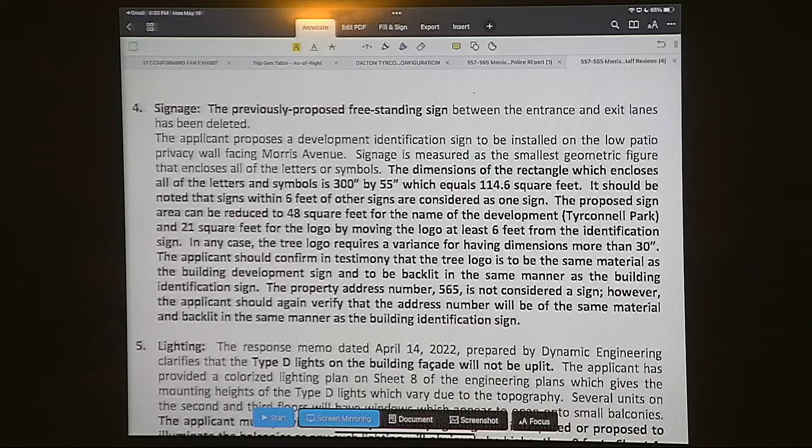Krista had a question about whether the number and the tree graphics would all be of the same materials, and the answer to that is yes. The intention is everything will be backlit in the same manner, so it will be consistent between the Tyrconnell Park name, the tree, and the letters and numbers. As noted by Krista, the numbers are not included in that 62.5 square feet because they're not required to be included in that number.

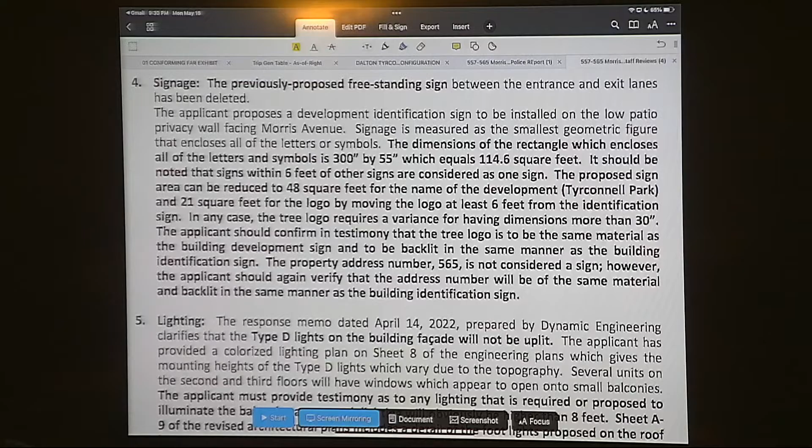Her next item, item 5, had to do with the lighting. Just to reiterate, the type D fixtures will not be uplit. That's also provided in the civil engineering testimony that will follow. The other question was just the trellis fixtures, which were mentioned before. Those fixtures are just downlight fixtures, and they will be concealed within the structure of the trellis. They're 9.5 inches high, and the trellis members are 12 inches high.

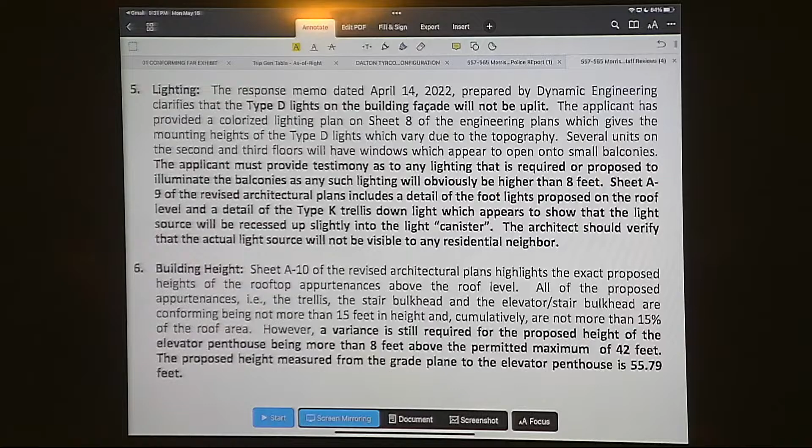Then item 5 on Krista's memo - there was one other comment that Krista had on the required lights on the balconies. All of those lights on the balconies are required, right? That is correct. We are required to have one light on those balconies, and they're type J fixtures, and they're shielded fixtures, so they just throw light down, and there's one at each balcony. Ms. Alfonso, can you go back to A9, just so the board members can have an opportunity to see the particular fixtures that Ms. Doherty is referring to.

When you say the balconies, you're talking about the usable balconies, not the Juliet balconies, correct? Yes, just wanna confirm there are no lights at the Juliet balconies, correct. And you said it's type J? It's type J at the balconies.

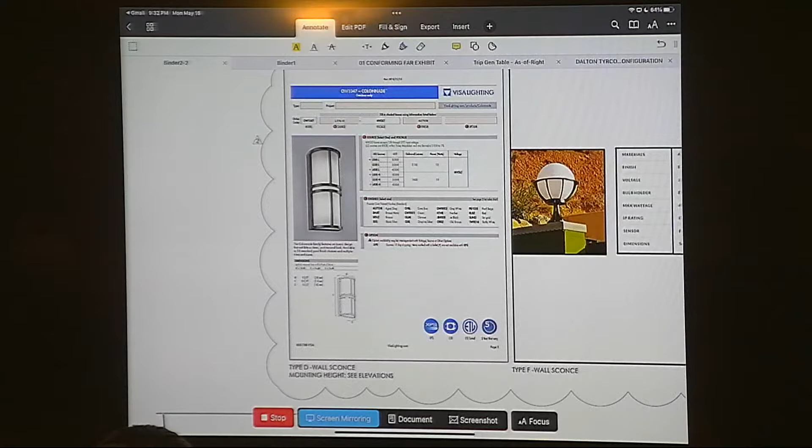That's the middle one here, right? Yes, that's right. And then previously you had indicated a type D. Can we show the type D as well? Sure, one more over. It's loading, okay, there it is. That was where Krista had asked whether or not that would be uplit, and you're testifying that that will only be downlit. That is correct, but it's a translucent glass.

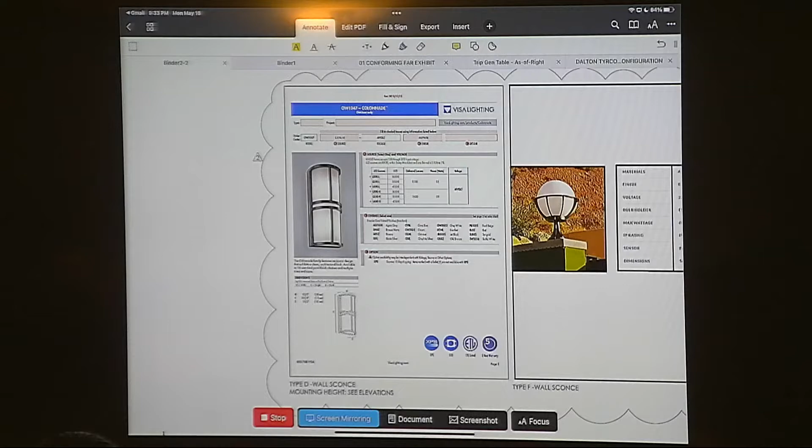Around the front of it. Yes. So I think the last item was the building height. There was a question about the elevator penthouse or appurtenance, and our drawings show 42 feet plus 15 feet to the top of the elevator appurtenance, so I believe it's actually 57 feet.

I'm not sure if the 55.79 feet that's indicated here was to - you're saying that in Krista's comments in paragraph 6, the last sentence, she says the proposed height measured from the grade plane to the elevator penthouse is 55.79 feet. So she's come up with a lower number than you. You're saying you're at 57. Yes, I would like to say it's 55.79, but we haven't had a chance to verify with Krista.

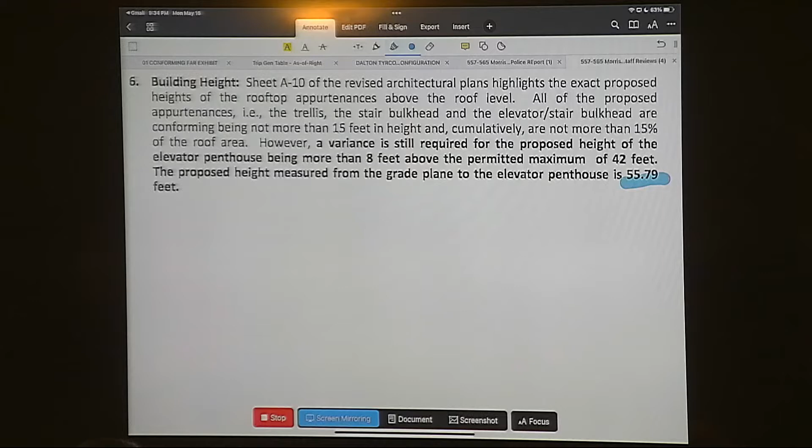From average grade to the top of the roof is 42 feet, and 15 feet for the elevator appurtenance is 15 feet, so... Mr. Chairman, we're going to be returning, and at that point there will be the opportunity to speak with Ms. Anderson and reconcile this discrepancy. Thank you.

I could ask you to look at the report of Chris Stewart, dated May 10th, 2022.

Mr. Chairman, again, your board professionals have all taken the time to review these revised plans, which are significant, together with the various reports provided, and have been able to respond in time for this board to have the reports available and for our witnesses to provide answers that are direct and responsive. So it bears repeating, Mr. Chairman, we appreciate it.

Mr. Dewar's comments, item 10. So item 10 was a question about the base site plan and the existing structures. I believe we've spoken about that a bit, and the civil engineer will have something about that in the updated civil engineering drawings.

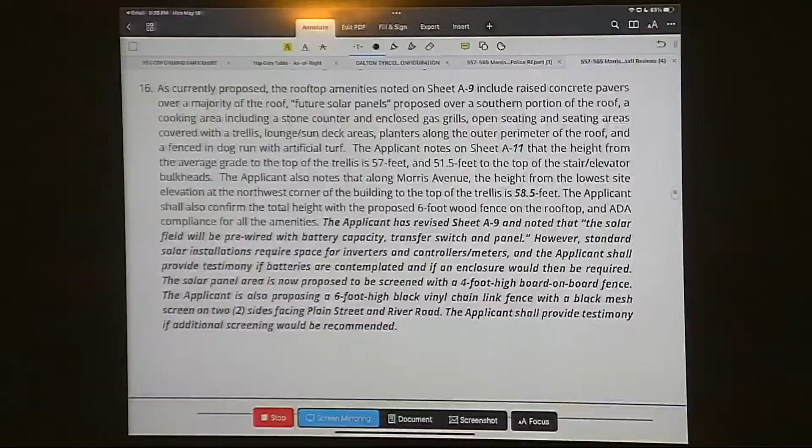Item 16 had to do with the solar installation, and the drawings were updated, which are mentioned here. Then there was a question about space for the inverters and the controllers/meters, and all of that would be contained within the fenced-in area that has the 4-foot board-on-board fence. If there will be batteries, anything related to the solar would be within that enclosure.

19 had to do with the emergency generator, and there was a question about what it says is exhaust on the lower level plan. That actually is just an air intake. The exhaust is going up through the roof and comes out in the appurtenance up on the roof. I think that's the answer to that.

If I can, Mr. Chairman, we've addressed the fact that all amenities will be available to COAH units. That's correct. The HVAC exhaust grills you've talked about, lighting information you've addressed, light levels at the top on the roof.

So the light levels, the fixtures on the roof, as I was describing before, everything will be 3000 K in terms of the temperature. The lumen levels I do have for all of the fixtures on the roof. Everything is either shielded or pointing directly down, so I know there was a question about potential glare outside the property, and that will not be an issue.

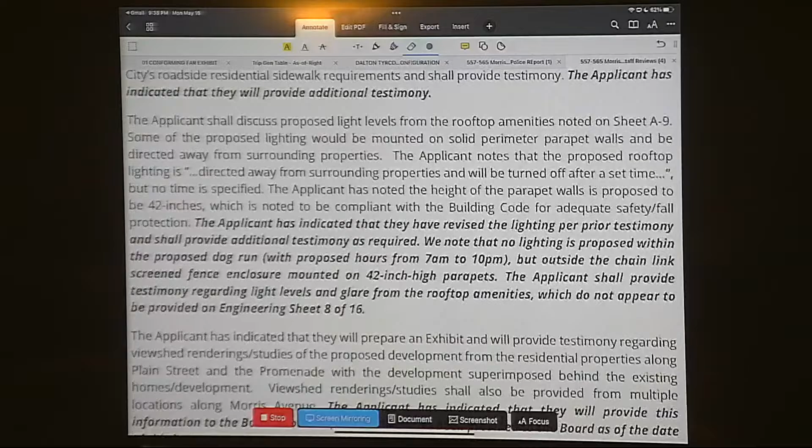What's an MEP? Mechanical, electrical, and plumbing engineer. Thank you. 28, the terrace balconies, which we spoke to before, those will be shielded type J fixtures, 1 at each of the resident balconies.

29, we just spoke about the light levels. And this is something also that the civil engineer will be addressing, in terms of the photometric study that they performed. That is correct.

Number 31, which had to do again with lighting, I think we've covered all of this. There was a question about the hours of operation on the roof, and Mr. Flanagan already testified to that, and the light levels and the glare from the rooftop amenities. And the fence that surrounds or is on 2 sides of the dog run.

The other fence is open and it's chain link, and there are parapet lights there as well that will illuminate the dog run, correct? That is correct.

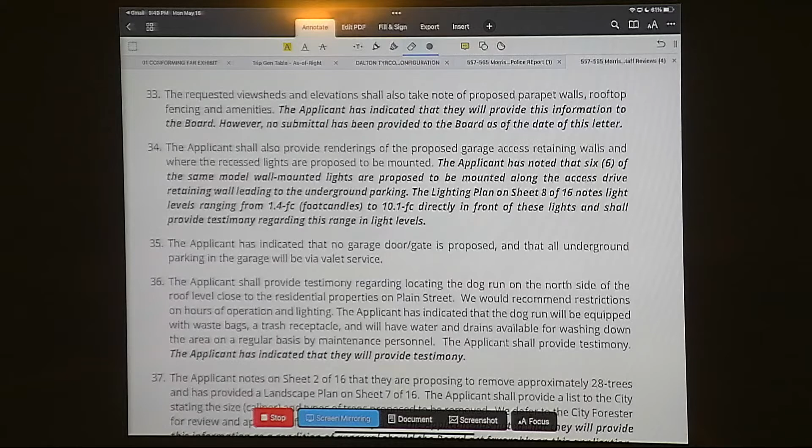And I think the last question was number 50, which had to do with whether there might be televisions, under additional comments. The answer is there may be televisions in the future, and they're not included at the moment on the rooftop. Under no circumstances would they be intended to have an impact on the neighbors or the residents within the building. There will be no sound system independent of the proposed television. That's correct.

And I think that was all of the specific questions. I have nothing further, Mr. Chairman. Mr. Dower, did they fairly represent your report?

There's a question regarding the screening around the dog run. We seem to be spending a lot of time on it, but was there a reason it was just 2 sides versus all 4 sides? I think so there could be visibility from outside the fencing, and also for the light, so that the light provided on the parapet would provide light into the dog run. So is there a reason to have lighting on the outside of the dog run where it's screened, if it's not going to shine through that screening?

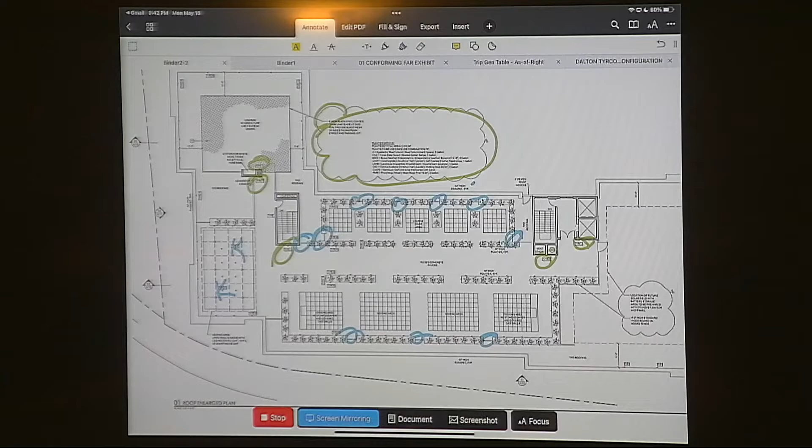So you've brought up the screen of A9, Ms. Alfonso, and what is being eliminated are the wall sconces on the parapet to the north and to the west. Correct, facing Plain Street and facing River Road.

Another question - could you mark those, Ms. Alfonso, so we understand which ones those are surrounding the dog run?

We talked about the different textures on the rooftop, with tiling, and is everything going to be flush and ADA accessible? For sure, all of the areas?

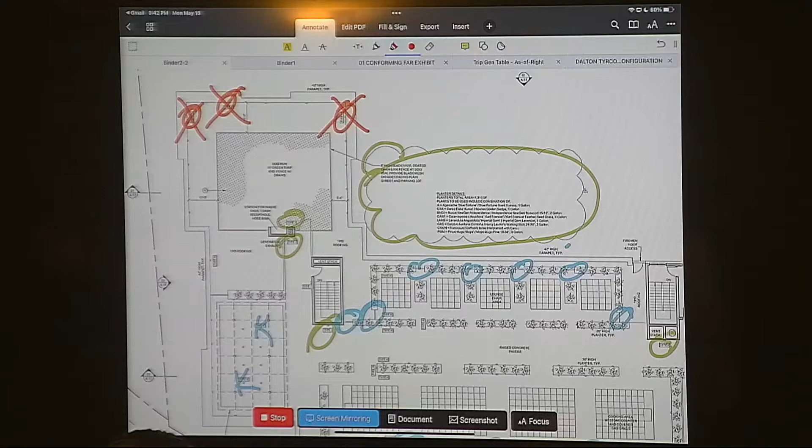Well, so the raised portion will be accessible, where the pavers are. The TPO roof will actually be lower than that, because when we come out of the elevators, we have to be flush, if you will. So I don't know if that answers the question.

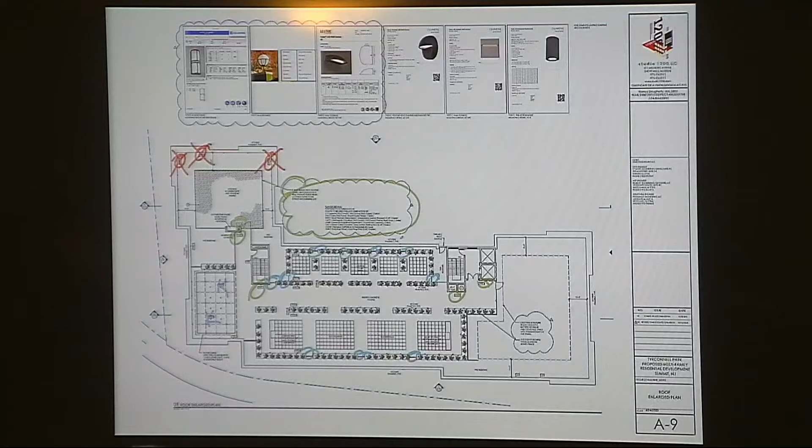But everything else, as far as anybody in a wheelchair or with a walker, will all be flush? Yes. Okay, but they'll have access to everything? Absolutely.

So the portion around the perimeter is lower, right? Because the TPO pavers will sit on top of the TPO roof. Right, because they'll sit on top of the roof. But there'll be some type of gradual transition, not a ramp, to get onto those built-up areas.

Anybody using the roof will only be on those pavers. Oh okay, I guess I was misunderstanding that.

Yes, so the inaccessible portions on the roof plan where it says TPO roofing are all outside the boundaries of the accessible portion, if you will.

So then, Ms. Doherty, you were referring to A9 in your discussion with Mr. Dewar. Yes, previously on the video, the areas circled by Ms. Alfonso show the type of barriers in order to prevent people from going onto the TPO, but staying within the available amenity. That is correct.

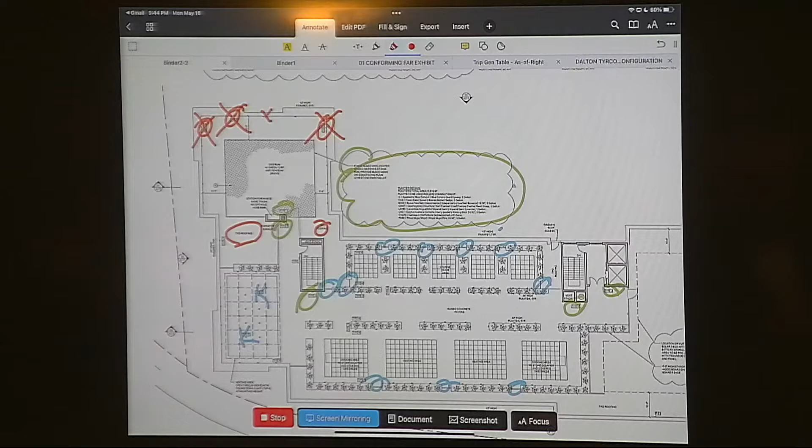And then in terms of the lighting that's going to be eliminated, Ms. Alfonso has only marked off a couple of those. There are other fixtures strewn across that wall, but they aren't designated as the particular ones. Right, so all those would be - well no, the ones on the side facing south have to be retained.

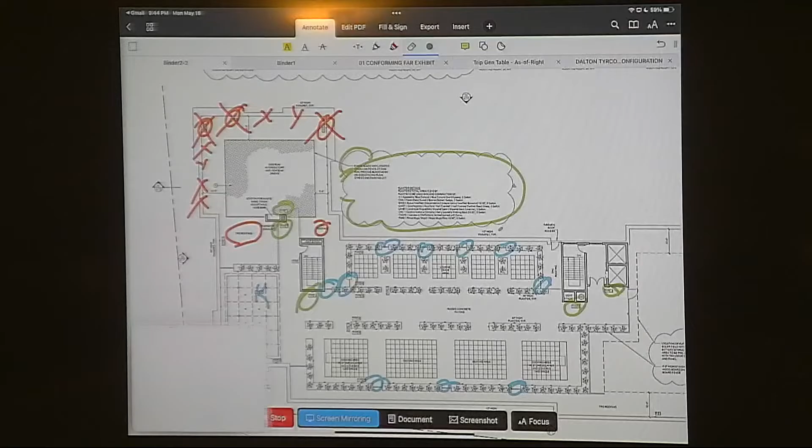I think we have the idea, Mr. Chairman. Yes, we do. Do we need to retain this copy? Sorry, we're just talking about how we appreciate your efforts and Ms. Alfonso's efforts to make these notations live. Thank you. There you go. We saw that a screen grab was just taken, so that'll be entered into the record for future reference. Thank you.

Regarding the rooftop, while we're up there, you indicated there's a barrier between all the planters to keep people from going towards the parapet area. How high will that be? Will you have a 42-inch high planter, or how high will the planters be? The planters are 26 inches to the top above the paving, and then the plants will be above that, obviously.

But there's little barricades between that as well, obviously for little children or anything like that to get too close to the parapet itself. Is that intended? Is there little barricades? Yes, so those will be either glass or some other material to prevent people from going in between those

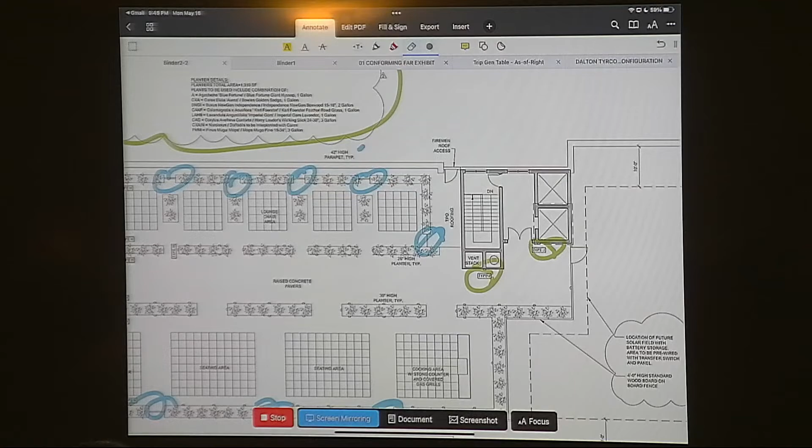planters out to the parapet. Okay, and what will occur near where the fire access doorway is? Is that also intended to be another division? I'm not sure you had one there or not. It is. So again, that will be lower, and to your point, there will be a division.

It's shown as a single line, but the line there will be a barrier. And then also by the trellis area, there'll be a seating area that will separate it from the parapet? There is a seating area that will be underneath that trellis. Okay, and that'll sort of form a barrier for someone going towards the parapet itself as well? Yes.

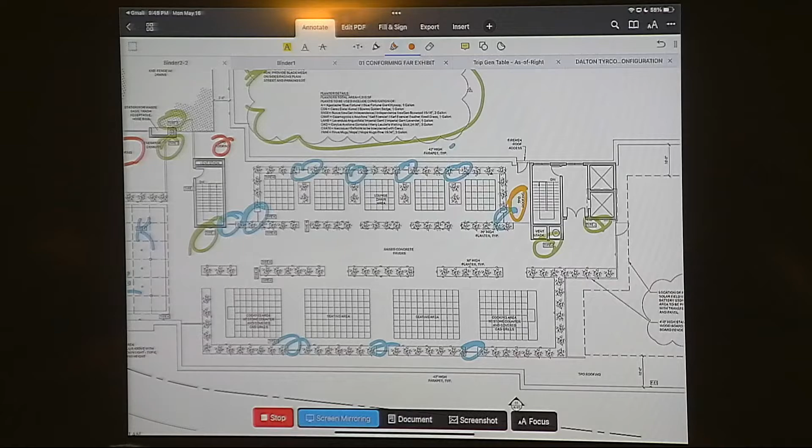I think I mentioned this at the last meeting, I can't recall, but was there a study done of the first floor, or the lowest elevation of the garage area, whether or not that was calculated as a story above grade? Did anybody look at that? Did the engineer testify to that? Okay, yes, thank you. That's all the questions I have.

Thank you. Questions from members of the board? The architect? Go ahead, Scott. Did you consider any kind of elevatoring system that would reduce the overrun or eliminate it?

I don't know of any system that would allow us to do that. We have to have those two elevators, one of those elevators going up there. We did try to lower the height of it, we talked about how many times they pushed on it. We may be able to come down 6 inches, but we're using the most conservative number right now. We have to get the hoist beam up there and some other things in that overrun. So we did look at it, and we've reduced it down to one of those elevators that has to come up there, so that's where we got to the 100 square feet.

Okay. Any other questions from members of the board? The only thing on my mind is the solar panel array, which is understood not to be included within this application. Though, to the best of your knowledge, maybe Mr. Weber, I'll start with you.

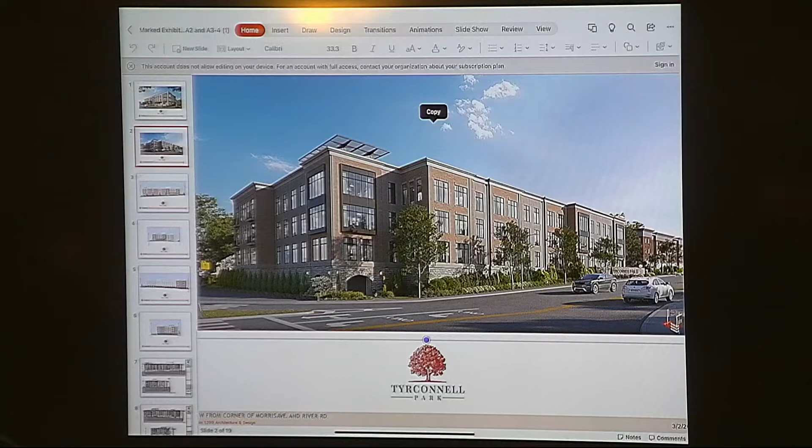So when I was talking about that corner access before, one of the pictures you put up, I didn't realize that you were keeping all of the cars in front, that lot right in front to park, the used car lot. So that was something I learned today, that used car lot is gonna stay. I thought that was all going.

So just understanding the demographics around that area is important to understand the space. The other thing, the hydraulic system, I forgot to mention, the noise of the hydraulics is really important. For people who don't understand that, it makes a lot of noise going up and down, it clicks really loud, and the only reason I know that is because I have a lift system. So my question for you is, how are you gonna handle the noise with the hydraulic lifts going up and down all day long for the neighbors specifically behind?

Objection as to whether or not it constitutes any noise. If there's a question as to what sound it produces, we can have that answered.

Okay, so do I ask the question of, does the hydraulic lift system make any noise first? Mr. Flanagan, maybe you want to answer that, or Mr. Weber, whomever else you'd like from your team. You're up, need to come back up. Mr. Flanagan, get your steps in.

All right, the lift system is not very noisy at all, especially coming down. When they come down, it's pretty much just a little release of air. When they go up, there's a motor noise, but this is also going to be in the basement, so there's going to be little to no noise leakage out of that basement.

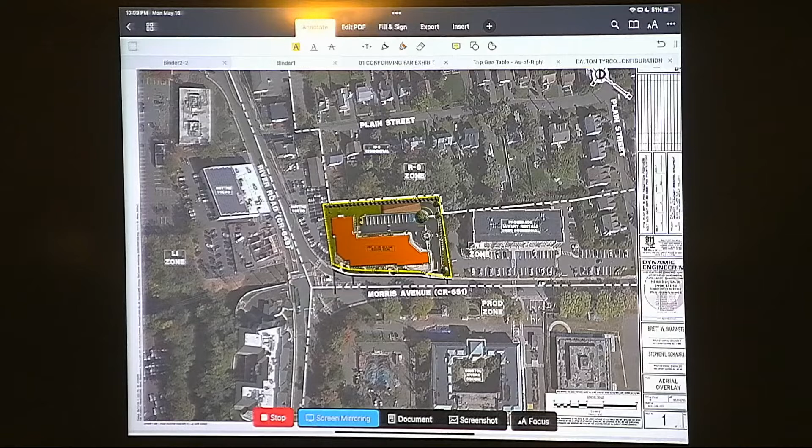Lastly, under existing conditions, stormwater generated by the site simply sheet flows towards the intersection of Morris Avenue and River Road, which will be greatly improved under proposed conditions, which we can discuss in more detail shortly. Now, if the board doesn't have any questions on the surrounding uses or existing conditions, we can move on to the next rendering, so we'll bring up the site plan rendering.

This is dated again with today's date of May 16th, 2022, at a scale of 1 inch equals 20 feet, and north is again to the top left corner of the page. This exhibit is a rendered version of the site plan that was submitted, and as previously testified, the applicant proposes to construct a 52-unit multifamily residential building, consisting of 3 floors of residential and an underground parking garage.

The NB zone only permits residential uses above the first floor, so we're technically a non-permitted use as we are not providing commercial uses on the first floor. A majority of the L-shaped building is pushed towards the roadway, approximately 86 feet away from the rear property line.

There is a small portion of the building in the top left corner closest to River Road, approximately 33 feet away from the rear property line. Now, as for access and circulation, per discussions with the adjacent property owner, the site plans were recently revised to provide additional clearance from our proposed driveway to the existing driveway for the Promenade development.

For clarity, the previous plans provided 8 feet of separation between the driveways, while the latest plans you see here provide approximately 26 feet of separation, which is greater than NJDOT's recommendation of 24 feet. I believe it was previously testified that the police department did review this prior to the hearing and concluded that they had no objections to the revisions.

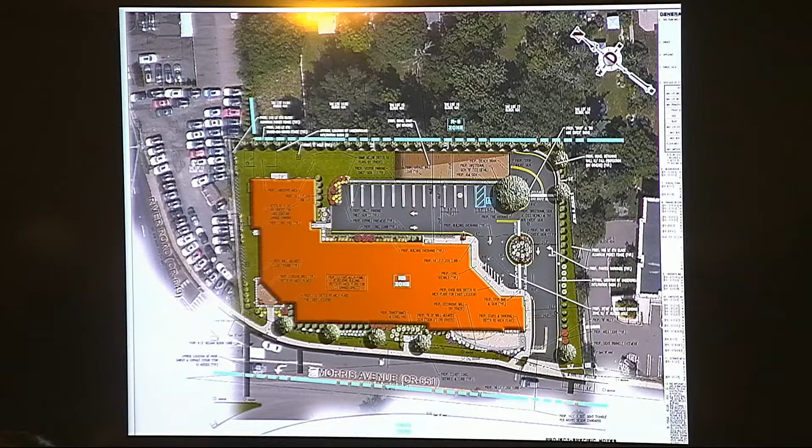Now, as a benefit to being a major development, under proposed conditions, stormwater generated by the site will be fully captured and detained to meet the required flow reductions by the use of 2 underground infiltration basins, improving existing drainage conditions.

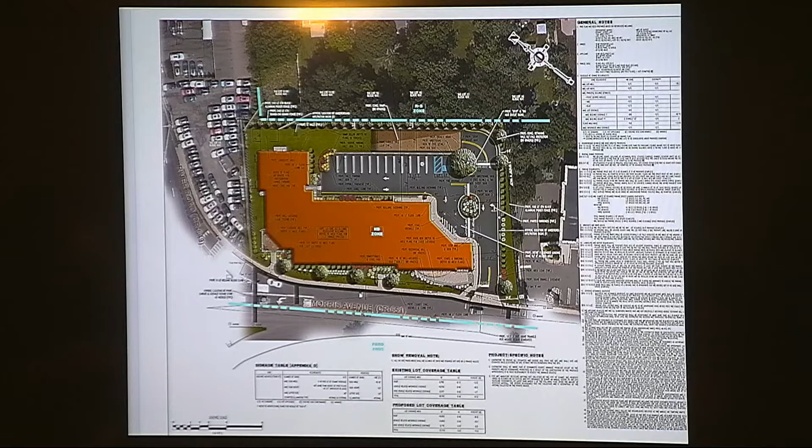Do you want to go to the site plan that shows the management of the stormwater? Sure, I believe it's actually shown on this plan. There's one located in the northern corner, in that grass area in the north corner of the building of the site, as well as the second basin being within the proposed driveway.

So moving on, vehicular-related. We'll just wait for Ms. Alfonso to show where in the proposed driveway. Thanks. Go ahead, Mr. Worry. It should be just a black box. Thank you. Thank you.

So moving on, vehicular-related impervious surfaces are also reduced by approximately 5,000 square feet as part of this development, so we'll be improving water quality on site.

In addition to this, stormwater pretreatment devices are also proposed to remove pollutants for 80% TSS removal prior to discharging to the existing conveyance system within Morris Avenue. What's TSS? Total suspended solids.

Lastly, as noted in Mr. Dewar's engineering letter, the applicant will be required to submit a grading permit prior to construction, as more than 600 square feet of disturbance is proposed.

Now, moving on to landscaping, a brand-new 6-foot fence is proposed along the rear and side property lines. Per discussions with the neighbors along Plain Street, the fence along the rear property line will be a brand-new solid cedar board-on-board fence to provide immediate screening of the property, essentially replacing the old fence that is there today.

While she's doing that, oh, that's not the one, Ms. Alfonso. There was a subsequent one, an updated one.

While she was doing that, when you're a major development and not just doing stormwater management, you're actually going to treat quality, dealing with suspended solids, the dirt that goes in the water. That's correct. As part of the development, we're reducing vehicular-related impervious surfaces, which is a benefit to water quality on its own. In addition, we're proposing pretreatment devices for 80% TSS removal rate, so we're going above and beyond from a water quality standpoint. This is not inexpensive, is it? They can get significantly expensive, yes.

I do have. Go ahead. Mr. Weber, we're just watching the time generally here. I know, so was I. 10:30, Chairman, will mean 3 hours, much beyond that. I don't have enough cupcakes for my board to go a second round, so help me watch the time. I believe the board still has other work to attend to besides this application. The board's work is never done, so we'd appreciate if you can find a logical stopping point, allowing at least 10 more minutes. I think we go through circulation, then touch on landscaping, and then lighting. I think before we get to lighting, we can cut it after landscaping. My stare will intensify if we've gone there, so we'll work on this together. Please, Mr. Ward. Okay, sounds good.

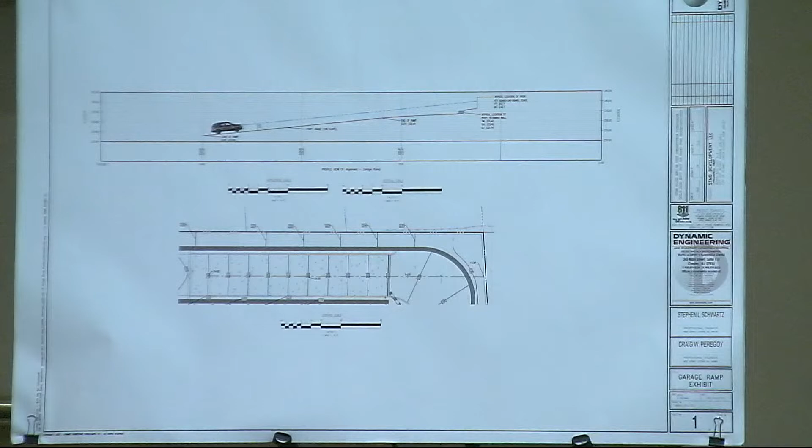Sticking with the fence really quick, the fence along the side property lines will transition to a 6-foot-high black aluminum picket fence. As noted in Ms. Anderson's review letter, we removed a portion of the fence within the front yard, which eliminated the need for a variance. This was the second variance we were able to eliminate with our revised plans.

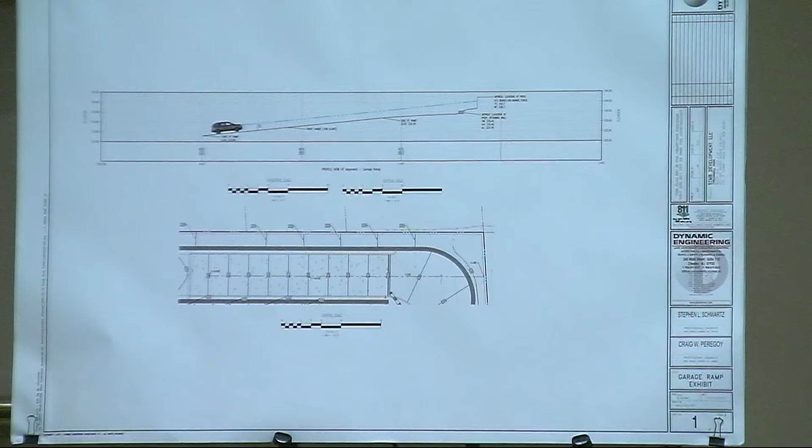Now, a 7.5-foot wide buffer is proposed along the rear property line to the proposed retaining wall of the ramp. This buffer includes a row of 28 green giant arborvitae, known to be great screening, providing a screen all year round. They will be 8 feet tall at the time of planting, and once established, they are fast growers, able to grow 2 to 3 feet every year until reaching a mature height of 30 to 40 feet.

In addition, there are utility poles and low-hanging wires at the rear of the property that are a bit of an eyesore and service the existing buildings. These will also be removed as part of the development, so we're really trying to clean up the area at the rear of the property.

As for additional plantings, we're proposing red maple street trees along the property frontage, as well as perimeter building plantings, evergreen shrubs along the north and side property lines, as well as other plantings within the surface parking islands.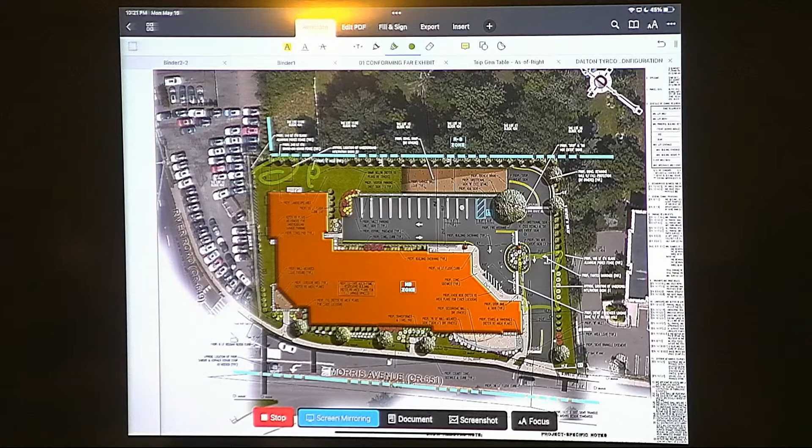Have you had an opportunity to review the report of John Linson in response to these most recent plans? Yes. And what was the date of that report, if you have it available in front of you? I have it as May 5th, 2022.

And if I could ask you to read it. Sure, I have it right here. So the review letter notes, on the tree planting detail, burlap and wire cages should be completely removed. Trunk flares should be exposed above grade. Otherwise, the landscape plan is fine. So for the first part of the comment, there's no problem for us to update our detail to comply. And second comment, we believe that there are no other comments on the landscape plan.

Mr. Chairman, I would ask that we conclude the testimony of Mr. Worry at this point, that we hold off for questions until he is recalled. We will recall him at the next hearing, and we will continue the civil engineering at that period of time. Excellent. Thank you, Mr. Worry.

Mr. Chair, I just have one comment. And just to confirm, when you look at the orange detail for the building, it doesn't really show that there is an overhang going to that courtyard. So looking at that, it looks like there's a notch cut out on the upper right-hand corner of the building. That's not really the case. So maybe in the future renderings, if you could outline where the building limits are.

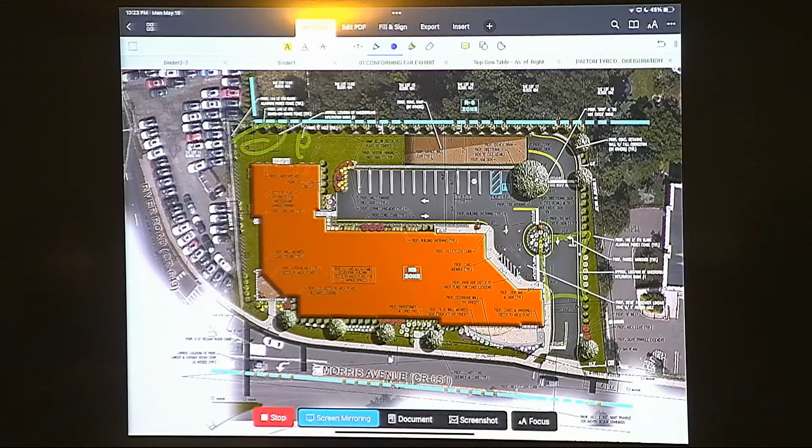That's no problem. It's hard to see, obviously, with the pavement below it, but there is a black outline of the canopy. We can make that stand out a little bit better with our next rendering. But that's really just to show the circulation underneath the canopy. We can outline that in a different color to try and get it to stick out a little better. Thank you. Okay, thank you, Mr. Howard.

Excellent. Thank you very much, Mr. Weber. Anything you'd like to say, just in conclusion, to contextualize this evening and what we can expect at the next meeting? I would ask that this be carried to the next available meeting. At that period of time, we will recall the civil engineer, Josh Worry, to conclude his testimony and be able to answer any questions. Then we would have the traffic engineer and the professional planner. So to the extent that the board can give us additional time and attention for this application, we should be able to conclude it at the next hearing.